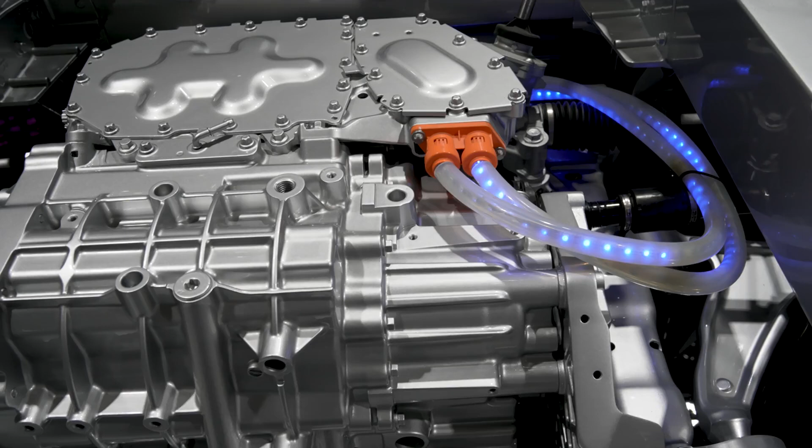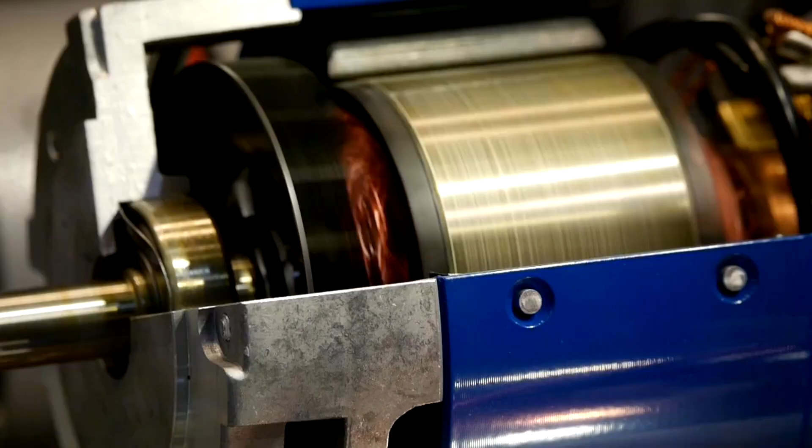Are you curious about the future of transportation? What if we told you that Toyota has just unveiled a new engine that could potentially change the game for the automotive industry? In this video, we'll be discussing the implications of Toyota's new ammonia engine and how it could impact the future of electric vehicles.

Toyota has introduced a groundbreaking technology that could reshape the automotive landscape: the ammonia engine. This innovation marks a significant departure from conventional fuel sources and could have a profound impact on the electric vehicle (EV) market. The ammonia engines developed by Toyota represent a leap forward in sustainable automotive solutions.

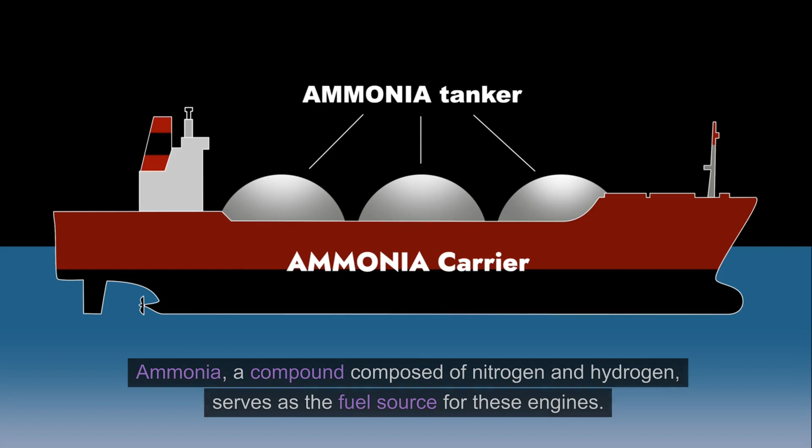Ammonia, a compound composed of nitrogen and hydrogen, serves as the fuel source for these engines. This departure from traditional gasoline or diesel engines is a bold move towards more eco-friendly alternatives.

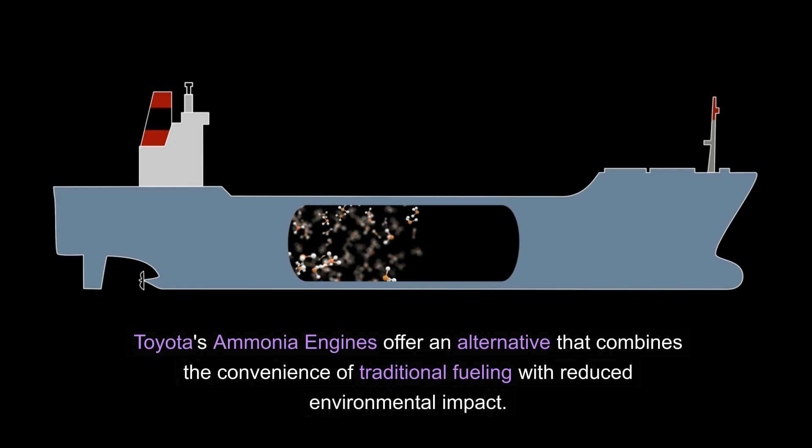The implications for the electric vehicle market are substantial. While electric cars have been gaining traction, challenges such as charging infrastructure and battery production have slowed widespread adoption. Toyota's ammonia engines offer an alternative that combines the convenience of traditional fueling with reduced environmental impact. Ammonia is abundant and can be produced using renewable energy sources, making it a potentially greener option compared to traditional fossil fuels. This innovation could appeal to consumers seeking sustainable transportation without the range anxiety associated with electric cars.

Additionally, Toyota's venture into ammonia engines introduces a new player in the alternative fuel space, providing consumers with more choices beyond traditional gasoline and electric options. This diversity could drive competition, fostering further advancements and making sustainable transportation more accessible.

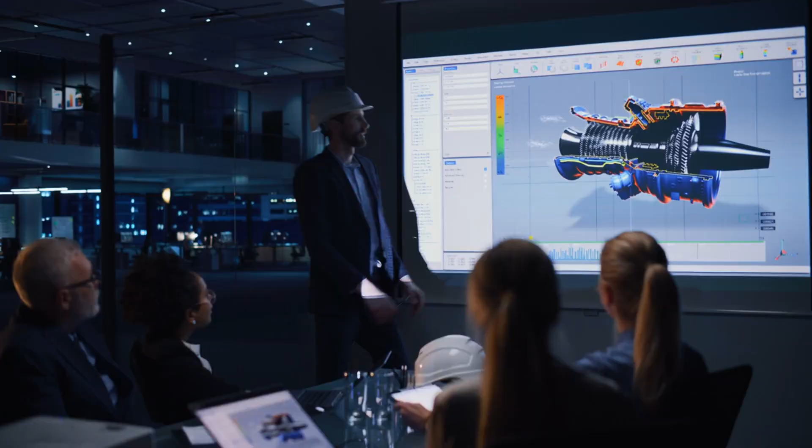While the full impact of Toyota's ammonia engines on the EV market remains to be seen, it undoubtedly adds an intriguing dimension to the ongoing evolution of automotive technology. As consumers and industries continue to prioritize sustainability, innovations like these contribute to a more dynamic and environmentally conscious future for transportation.

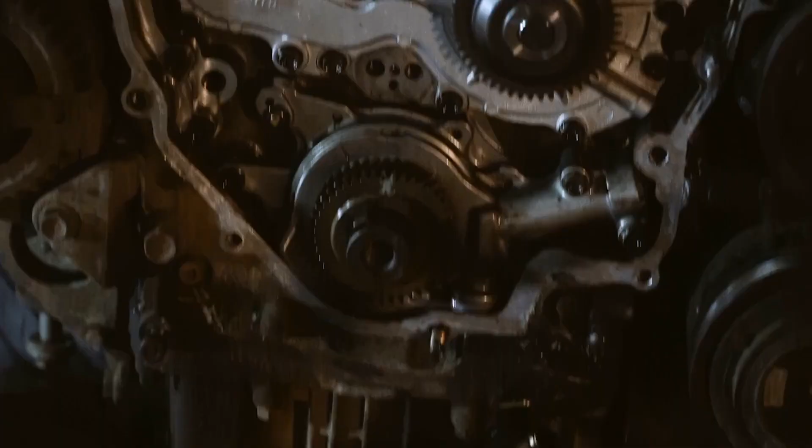Toyota has partnered with Guangzhou Automobile Group (GAC) to develop an innovative internal combustion engine powered by ammonia. The prototype engine is a 2.0-liter four-cylinder with 161 horsepower and a 90% carbon emissions reduction rate compared to a fossil-fueled engine with similar capacity and power.

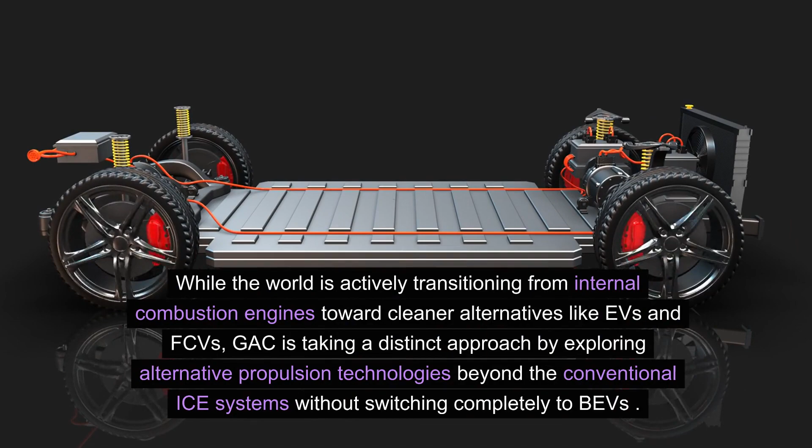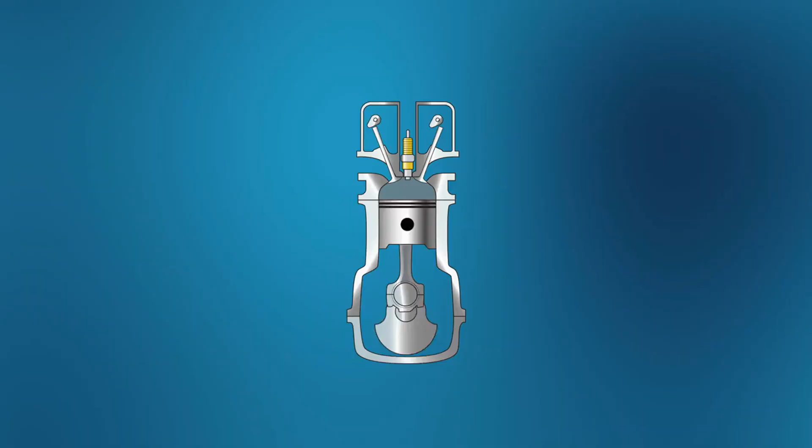While the world is actively transitioning from internal combustion engines toward cleaner alternatives like EVs and FCVs, GAC is taking a distinct approach by exploring alternative propulsion technologies beyond conventional ICE systems, without switching completely to BEVs. The ammonia engine could potentially become a death stroke for the proliferation of EVs.

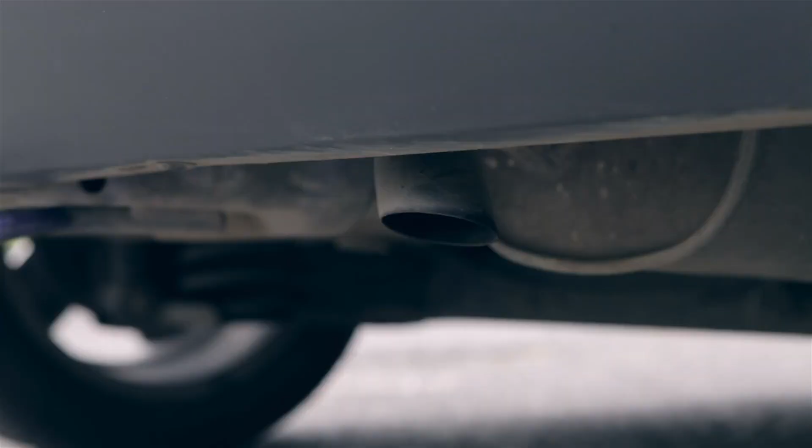However, Toyota's involvement in ammonia engine technology suggests a future where cleaner and more sustainable transportation options, including alternative fuels like hydrogen and synthetic fuels, could potentially extend the lifespan of combustion engines and offer a compelling and eco-friendly choice for consumers. The 2-liter four-cylinder ammonia engine generates 161 horsepower output.

The companies claim that it cuts carbon emissions by 90%. This could offer an important new option for vehicle design and could contribute to the decarbonization of the transport sector. While the ammonia engine is still in its early stages of development, it has the potential to offer several benefits. For instance, the ammonia engine could potentially extend the lifespan of combustion engines and offer a compelling

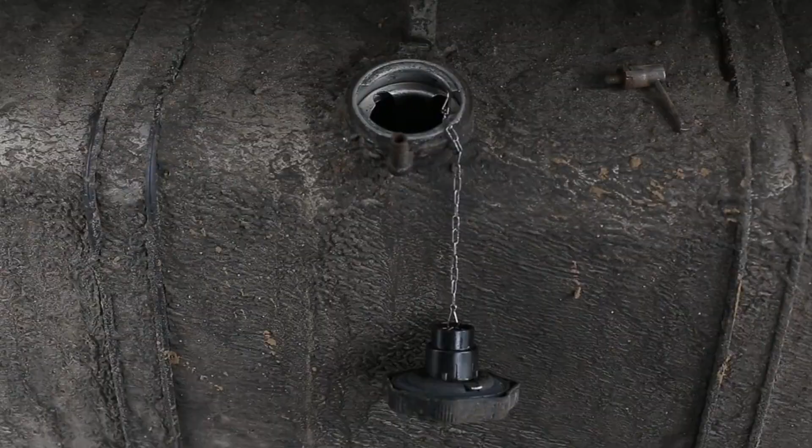and eco-friendly choice for consumers. Additionally, the use of ammonia as a fuel source could contribute to the decarbonization of the transport sector. However, it is important to note that the use of ammonia as a motor vehicle fuel would require a significant change to current infrastructures, both in ammonia production and fuel storage and transportation.

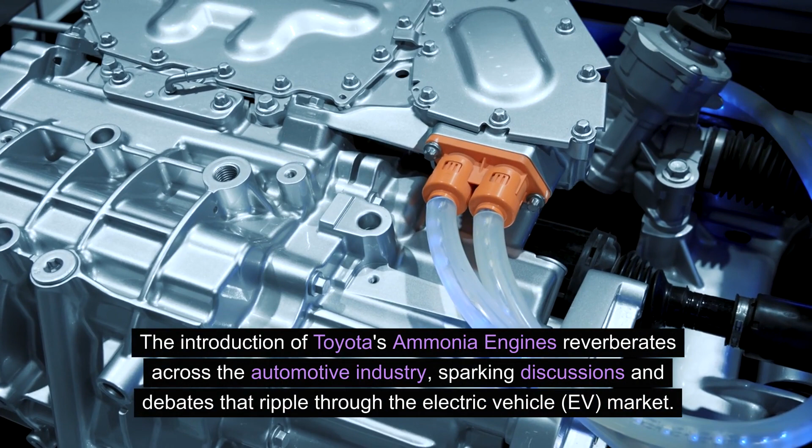Furthermore, Toyota's involvement in ammonia engine technology suggests a future where cleaner and more sustainable transportation options, including alternative fuels like hydrogen and synthetic fuels, could potentially extend the lifespan of combustion engines and offer a compelling and eco-friendly choice for consumers. The introduction of Toyota's ammonia engines reverberates across the automotive industry, sparking discussions and debates that ripple through the electric vehicle (EV) market.

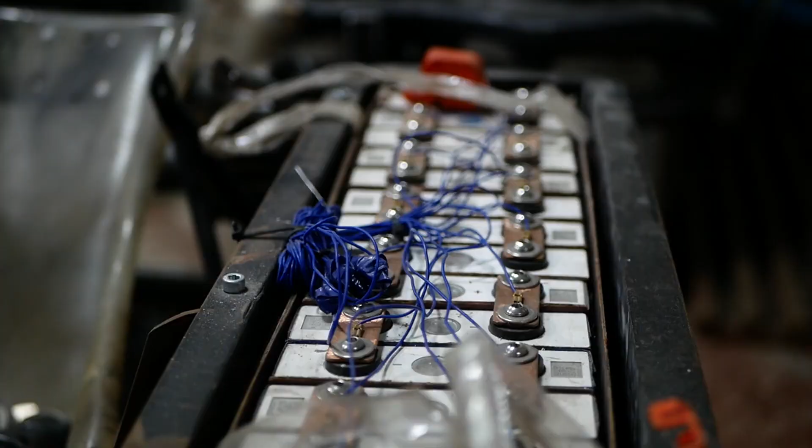As the news spreads, industry experts, enthusiasts, and competitors alike scrutinize the potential implications of this revolutionary technology. In the realm of electric vehicles, where lithium-ion batteries have been the reigning champion, the ammonia engines present an alternative that challenges the status quo.

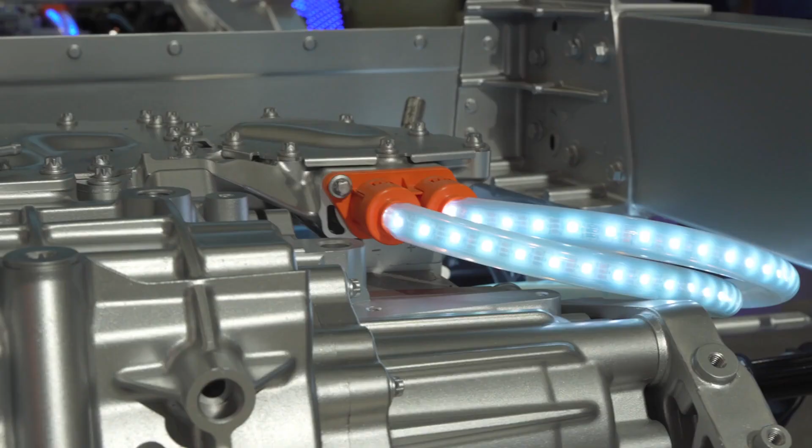The lingering question on everyone's mind is whether this innovation will disrupt the growing dominance of electric cars or complement the existing landscape. Proponents of the ammonia engines highlight their potential to address some of the persistent challenges facing electric vehicles.

Range anxiety, a common concern for EV owners, could be mitigated by the convenience of traditional refueling offered by ammonia-powered cars. This advantage, coupled with the eco-friendly nature of ammonia production, positions Toyota's innovation as a viable solution for a broader audience.

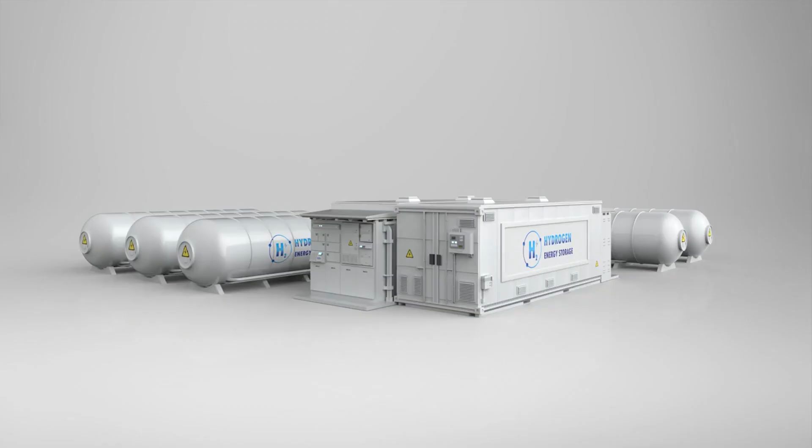Conversely, skeptics express reservations about the scalability and infrastructure required to support ammonia-powered vehicles. While electric charging stations have become more prevalent, the prospect of establishing a parallel network for ammonia refueling raises logistical questions. The success of ammonia engines may hinge on the industry's ability to address these concerns and develop a comprehensive infrastructure.

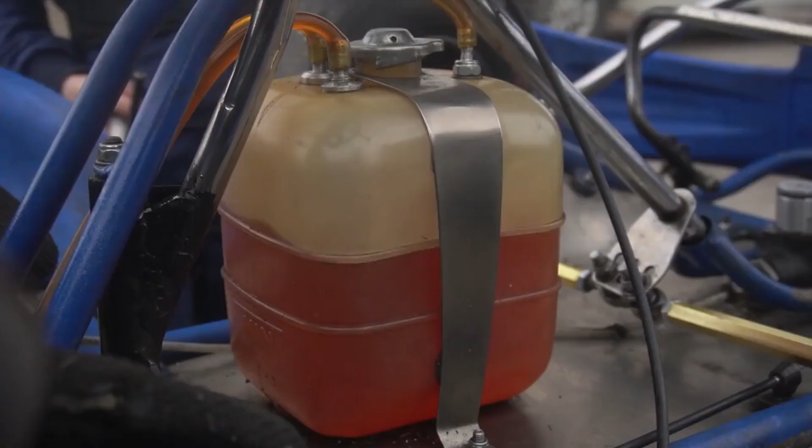The entry of a major player like Toyota into the alternative fuel space adds a new layer of competition. Automakers are prompted to reconsider their own innovation pipelines, ensuring they remain at the forefront of sustainable technology.

As consumer interest in environmentally conscious transportation grows, Toyota's ammonia engines create a unique niche. Potential buyers are intrigued by the prospect of a green alternative that doesn't compromise on convenience.

The automotive landscape, once dominated by the binary choice of electric or traditional combustion engines, is evolving into a spectrum of options, each catering to different preferences and priorities.

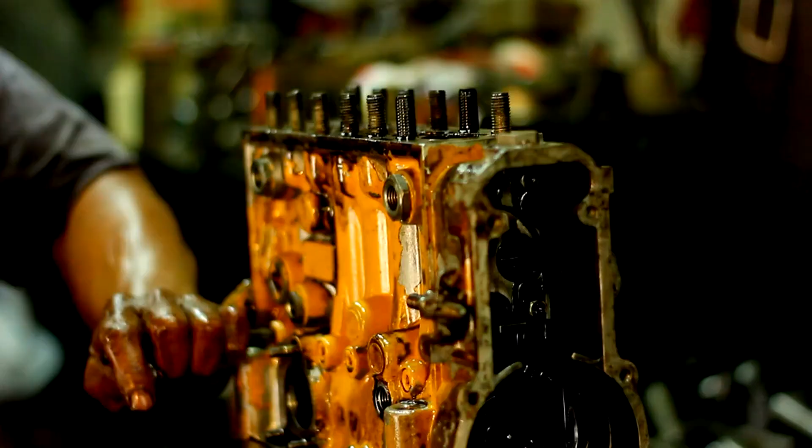The ammonia engines chapter is still in its early stages, and the subsequent developments promise to be both fascinating and impactful. Will this innovation be the missing link that accelerates the adoption of sustainable transportation, or will it face hurdles that limit its widespread acceptance?

Only time will tell as the automotive industry navigates this uncharted territory, guided by the drive for innovation and a commitment to a greener, more sustainable future.

Chapter 3. The industry's response.

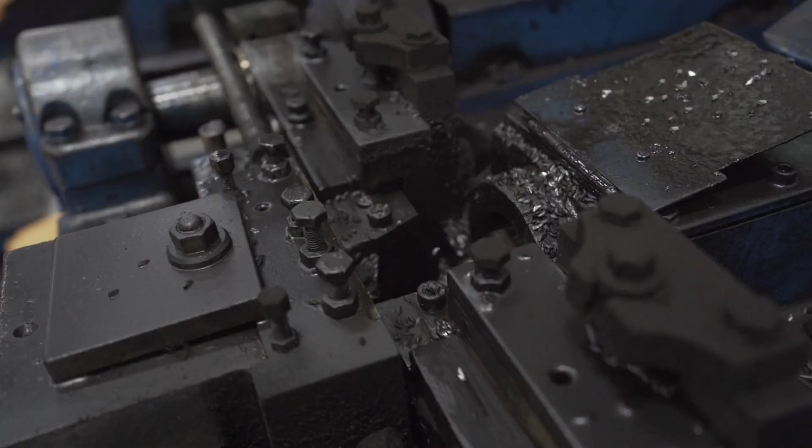Toyota's ammonia engines have set the stage for a paradigm shift in the automotive industry, prompting competitors to reassess their strategies and driving stakeholders to grapple with the implications of this innovative propulsion system.

Automakers, once content with the well-established dichotomy of gasoline and electric, are now facing a pressing question: adapt or be left behind? The industry's response is a flurry of activity, as companies initiate research and development programs to explore alternative fuel solutions that align with the changing demands of consumers.

Some automotive giants, recognizing the potential of ammonia-powered vehicles, begin their own forays into this uncharted territory. Research alliances are formed, bringing together expertise from diverse corners of the industry to accelerate the development of ammonia-based propulsion systems. The race is on not just to catch up with Toyota, but to surpass, each company vying for a competitive edge in the burgeoning market for sustainable transportation.

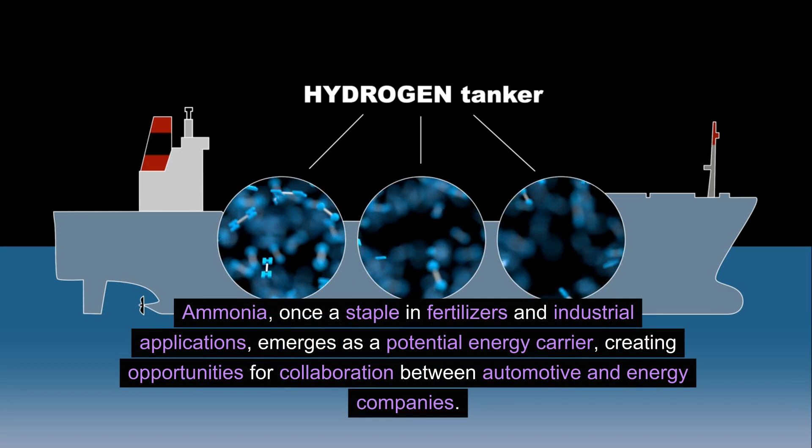Meanwhile, the energy sector experiences its own upheaval. Traditional fuel suppliers confront the reality of a shifting automotive landscape and grapple with the need to diversify their offerings. Ammonia, once a staple in fertilizers and industrial applications, emerges as a potential energy carrier, creating opportunities for collaboration between automotive and energy companies. The lines between sectors blur as the quest for sustainability drives cross-industry partnerships and innovation.

Governments, recognizing the environmental benefits of ammonia-powered vehicles, begin to adjust their policies to encourage the adoption of this emerging technology. Incentives and subsidies are introduced to spur investment in infrastructure for ammonia refueling stations, paralleling the initiatives that have supported the growth of electric charging networks. The regulatory landscape evolves, creating a conducive environment for the development and deployment of ammonia-powered cars.

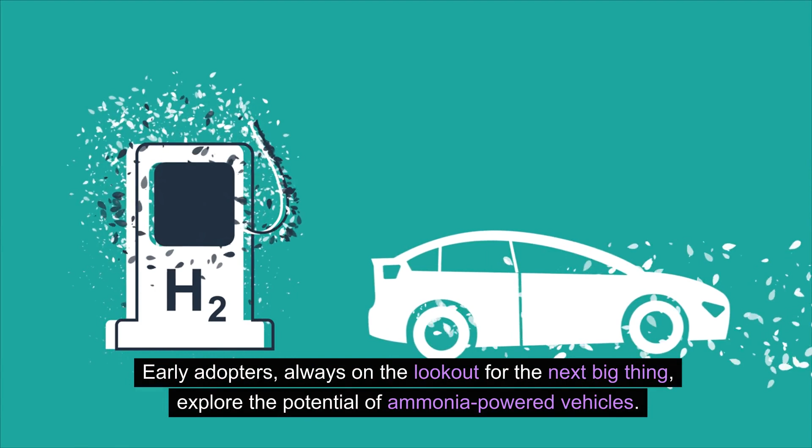On the consumer front, curiosity transforms into genuine interest. Early adopters, always on the lookout for the next big thing, explore the potential of ammonia-powered vehicles. Test drives become a journey into the future, with consumers experiencing firsthand the marriage of convenience and sustainability offered by this new breed of cars.

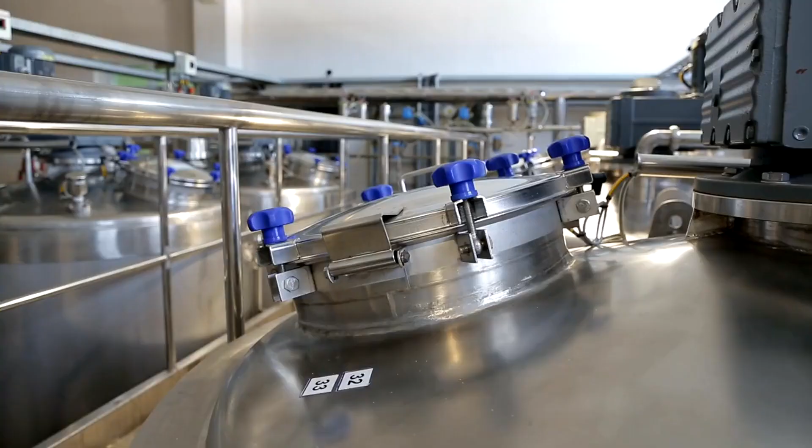Yet challenges persist. Concerns about the safety of handling ammonia, the environmental impact of its production, and the scalability of infrastructure remain on the forefront. As the industry collectively works to address these issues, the journey towards widespread acceptance of ammonia engines becomes a collaborative effort involving not just automakers but a network of stakeholders committed to shaping the future of transportation.

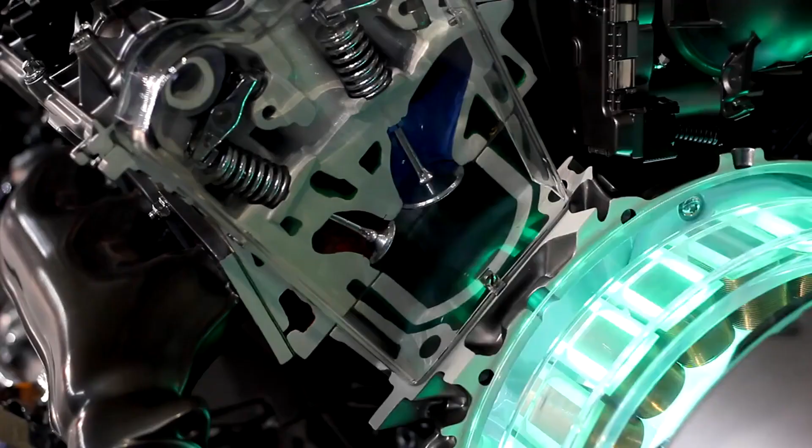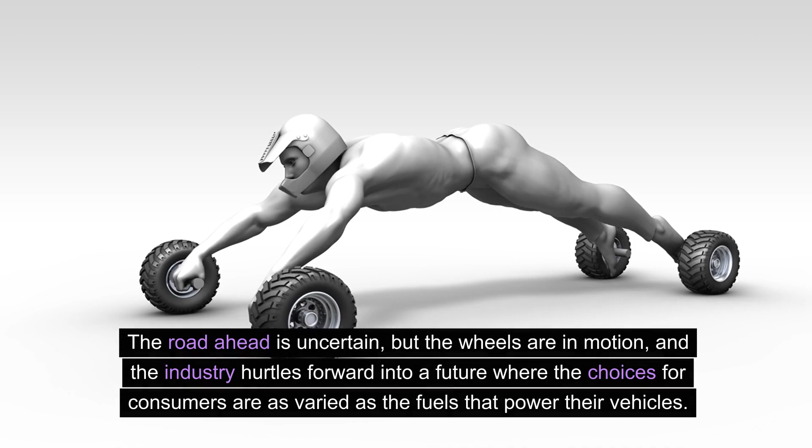The third chapter in the saga of ammonia engines unfolds against a backdrop of transformation, where the automotive industry, once resistant to change, embraces the challenge of creating a more sustainable and diverse array of propulsion systems. The road ahead is uncertain, but the wheels are in motion and the industry hurtles forward into a future where the choices for consumers are as varied as the fuels that power their vehicles.